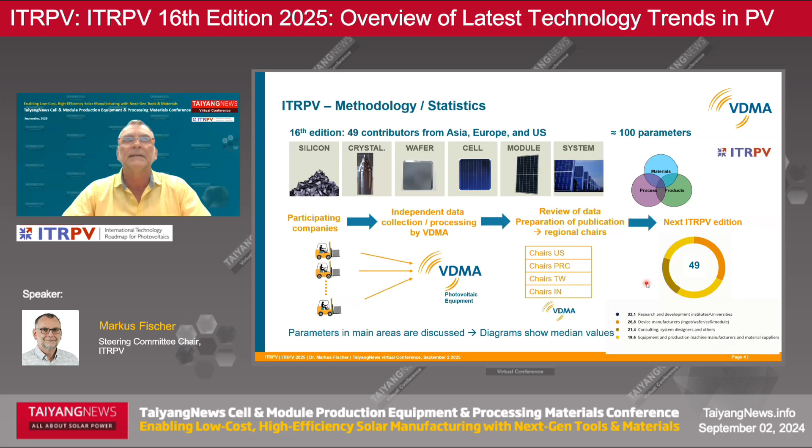So the 16th edition was issued based on the contribution of about 50 contributors from Asia, Europe and the US. So we have this well-known structure here to cover the value chain, and the preparation of the 17th edition just started, and I invite you also to contribute, and this would be highly appreciated.

So now let's start here with the learning curve. So the summary is here, the price learning of the modules that are shipped. And based on the shipments of last year, we calculated about 700 gigawatts of modules shipped at a tremendously low price of $0.08 per watt peak. And the expectation is for this year that these numbers will be even larger from a shipment point of view. So we expect 750 gigawatts, and the price is expected to stabilize.

So installation, in contrast, is a little bit lower. Nevertheless, it is a huge amount of material in the market, and a tremendous price drop. So it was in the past also visible in the learning curve. So we had several phases of price reductions, and afterwards the price recovered a bit. And so we expect this as well.

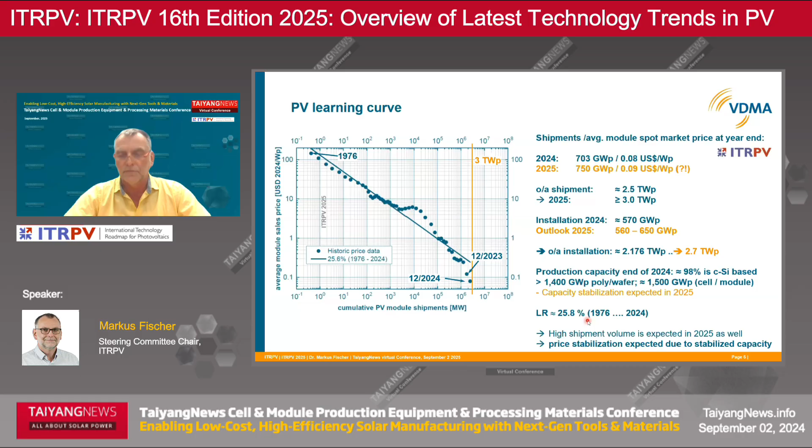But nevertheless, despite the price stabilization and the huge overcapacity, it is a big challenge to continue the development. And so we will see what is the expectation here to maintain this learning rate of about 25% also for the next years. So what was the scheme for calculating the price here?

The shift from the material point of view in crystalline silicon-based PV was from multicrystalline to mono, and now from P-type mono to N-type. N-type is dominating, and we saw at the end of last year no big differences between N-type and P-type prices.

And the very interesting point regarding the volumes shipped is that not everything went into installation of new capacity, but also a significant share of the shipped material went into repowering. And here, beside Thalheim in Sachsen-Anhalt, Germany, we have a power plant, and there we find quite excellently that repowering occurs. So this part of the field was repowered with much less modules than expected. So this does not increase the overall installed capacity.

So this brief introduction leads me now to the trends. As mentioned before, N-type is now the mainstream material. Nevertheless, we still have some P-type material in the market. And a very interesting trend that we found in the past is the trend of the wafer formats. And this is the thing that material suppliers and especially the equipment suppliers have to take care of.

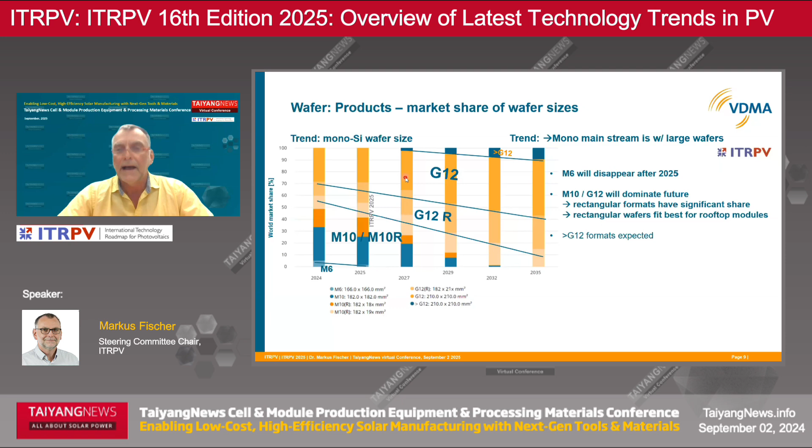So the trend from the smaller formats: M6 is now nearly gone. M10 and M10R are still in the market, but the biggest share is with the large formats, G12R and G12. And these we expect to be dominant in the future.

And here the interesting thing is the thickness of the material. What we see here is that the thickness for PERC, for P-type, is coming to an end. So 130 microns will be the end. But for N-type, we see that the trend is going to 120 microns.

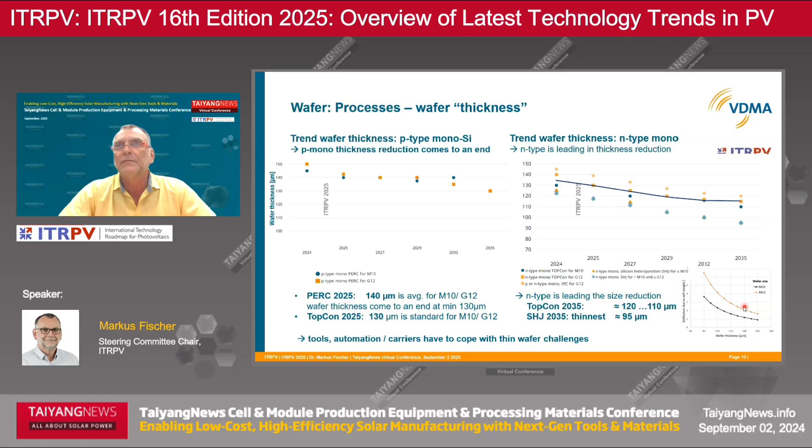So I saw the first G12 also with 110 microns in the market, but this is more or less important for today for the heterojunction. But for TOPCon, the dominating format in the market is 130 micron. And this will contribute to a significant price reduction in the future. Nevertheless, the tool suppliers have to care about the thin wafers and the challenges that come with them.

So now let's have a look at the cell products, and this is the most important trend we see in the market: TOPCon is now the dominating technology in the market. So in 2025, PERC is expected, from the ITRPV point of view, to have less than 20% market share. Maybe the changeover will go faster. And we see other N-type technologies as well. So heterojunction and XBC, the back contact cells, are coming more and more into the market. And all these things are ready for bifacial. So this is very important to know.

And what is important, with this technology changeover, especially since we have this huge overcapacity, new capacity is only possible by replacing existing capacity. And so for these technologies, the tools have to be ready and the tool and material suppliers have to support this transformation. So now to the details in the process that the ITRPV found.

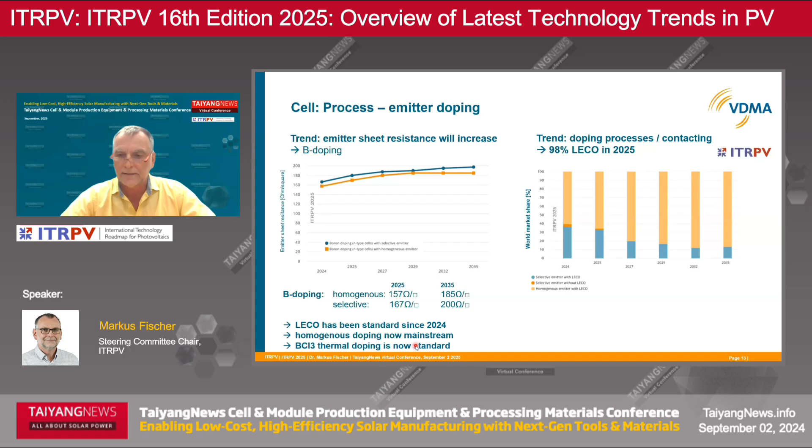So, trends in wet chemistry. We see that especially regarding the edge isolation, we have a changeover from HF/HNO3 to alkaline etching. So the phase-out of HF/HNO3 is continuing. And regarding cleaning processes, we see that ozone-based cleaning is gaining more and more market share. Heterojunction currently also uses RCA cleaning, but ozone-based cleaning has a big market share also for heterojunction.

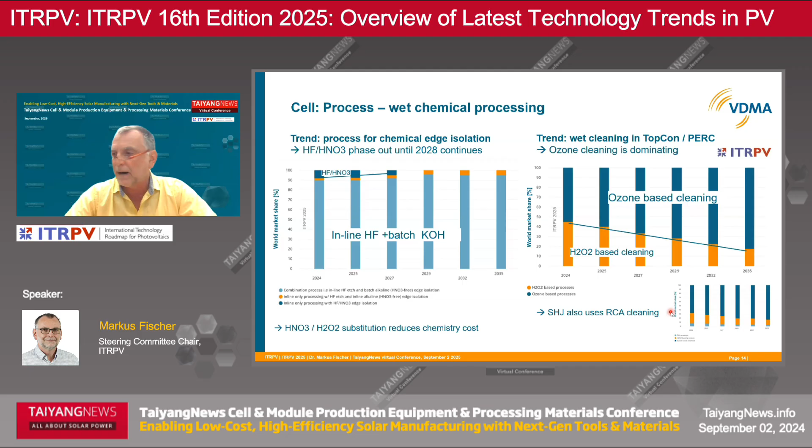So then we will also see in the conference trends and tools for ALD for aluminum oxide passivation, which is used for PERC and TOPCon. And we will see, especially for the TOPCon technology, how the amorphous silicon is formed. And ITRPV sees that there is a 50-50 share so far, also for the future. But it will be interesting to see what will be the tool concept of the future. And there we will see some interesting presentations, I expect.

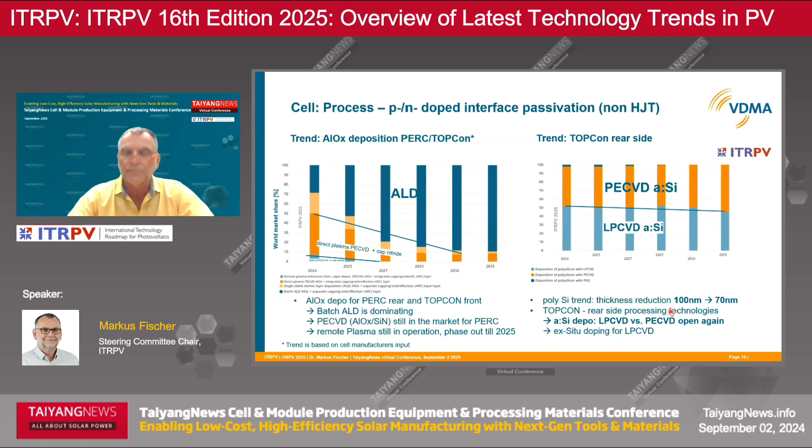So coming to the tools, this is also a parameter that is reported in the ITRPV: the tool throughputs. Regarding throughput, the wet bench tools are really leading the crowd, but nevertheless ALD in the future is expected to increase the throughput up to 18,000 wafers per hour. So this is a tremendous increase, and let's see how this will be realized, but this is required to also lower the production costs. And boron diffusion is currently at the lower end of the throughput, but is also expected to be improved.

So a very important and the most costly material besides silicon on the cells and on the modules is the silver. And there we see the trend that silver consumption is reduced. We have defined in the ITRPV a kind of minimum requirement for the silver consumption per watt, and we have the differences for the different technologies. So PERC is currently consuming the least amount of silver. But what we see is that the minimum requirements of ITRPV are now even beaten by the current tier 1 suppliers. And the World Silver Survey found that the overall silver consumption last year was about 6,000 tons.

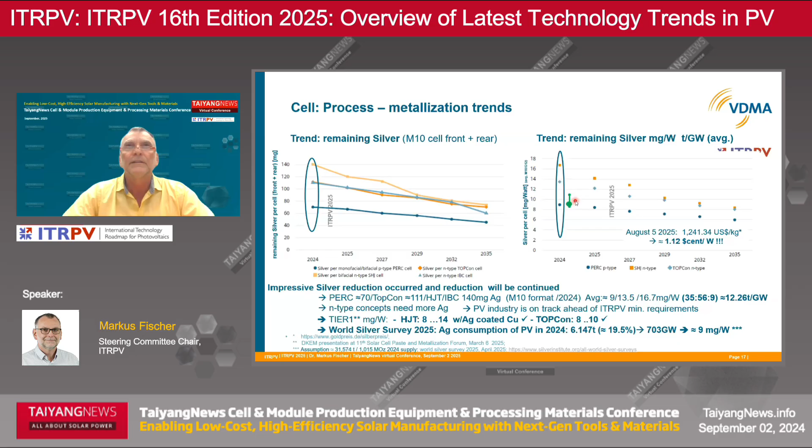And this corresponds at the 703 gigawatt chip to about 9 milligrams per watt. And this is well below the minimum requirements and well on target. So that will ensure that we have for silver no shortage in the future. This is a very important message, and we have had this discussion for some years. So will we run out of silver?

So based on the technology development, and I expect here also from DKEM some interesting news about the silver consumption, we are on a good way. And reducing the silver consumption is also supported by the new technologies, heterojunction and the new coming tandem technology. So we will more and more use also copper with silver coating and maybe also pure copper. So this is expected for the future.

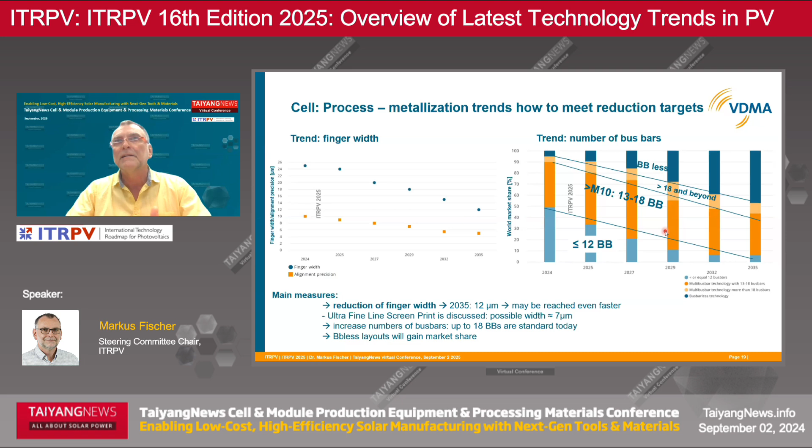So how to realize the silver consumption reduction? This is mainly done by reducing the finger widths. There are really impressive new technologies for printing, and ultra fine line screen printing is also possible with down to 7 microns. So this will also be in line with roadmap requirements, and this finger reduction goes in parallel with increasing the number of bus bars, and the trend to more than 18 bus bars and the trend to bus bar less is going on.

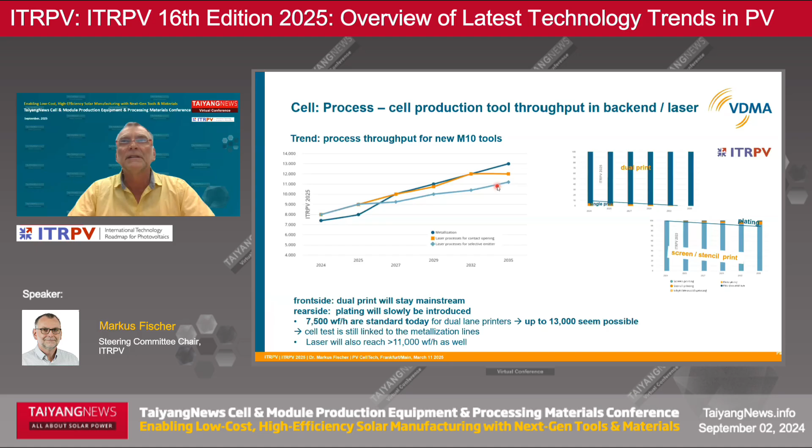And regarding metallization and test, we see here also the throughput outlook, and the 7,500 wafers per hour are standard today, and the expectation is that this will increase up to 13,000 wafers. So let's see how this will be realized.

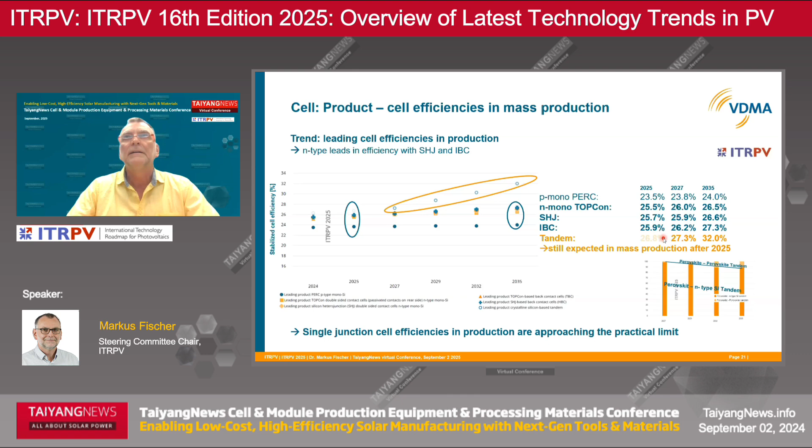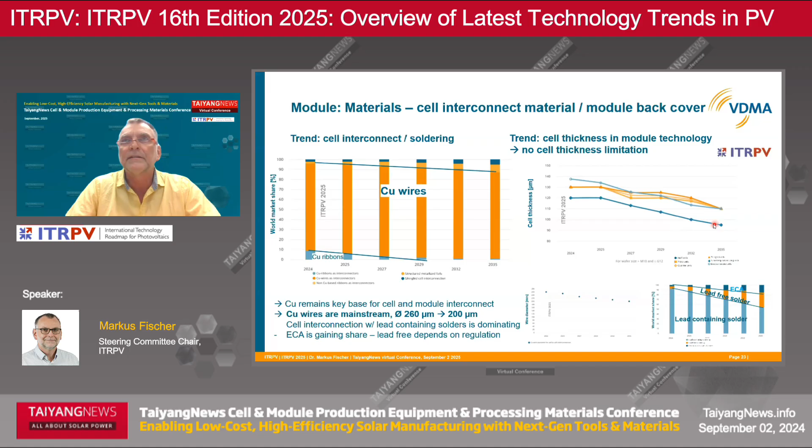So now some highlights on module. Copper wires will stay here the main interconnect material. And what is important here, the module technology can handle also the thin wafer, so this will be no problem at all for module technology.

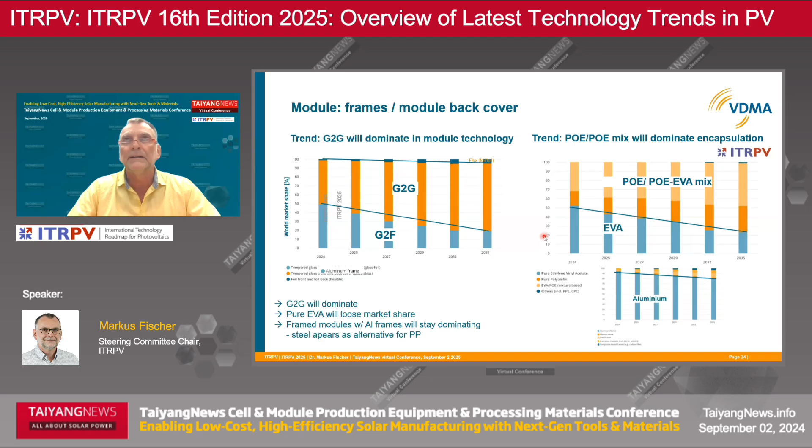So module trends. Shravan mentioned that there is big progress and a lot of products in the market. Glass to glass is gaining more and more, especially also with TOPCon technology. Nevertheless, there are here with the materials also challenges for the encapsulation. And here I expect also in this conference some news about encapsulation materials and backsheet materials for the glass to foil.

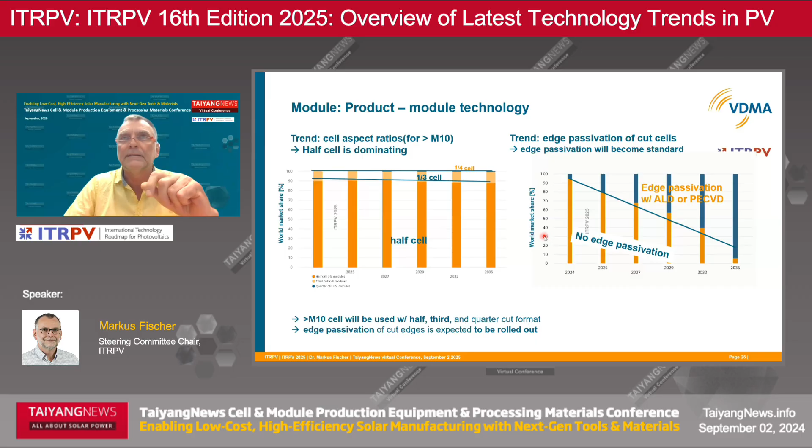So here half cell is standard. And interesting is also, to even increase the efficiencies, that we will see edge passivation in the market for these cut cells. And module efficiencies are expected to go in parallel with the increase of efficiency on the cells, to above 26% with tandem, but on a level of about 24% with mature single junction technologies.

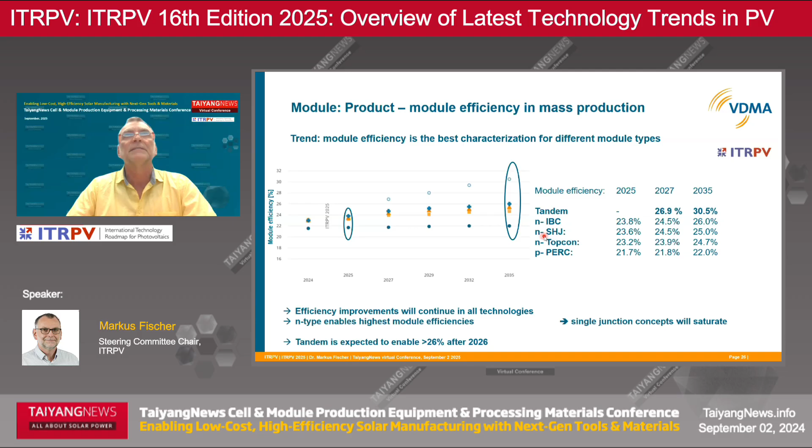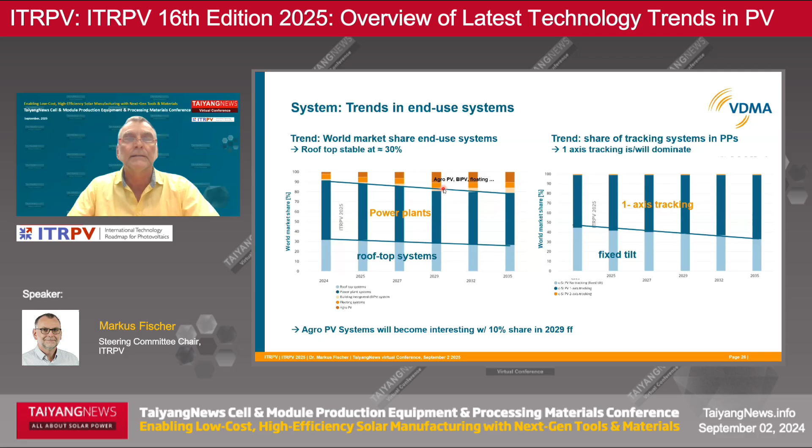So now a brief summary on the system trends. First of all there are the mainstream applications, rooftop systems and power plants. The share of rooftop systems is expected to stay constant over the next years. But here we see new applications coming up, especially agro PV, BIPV, and floating.

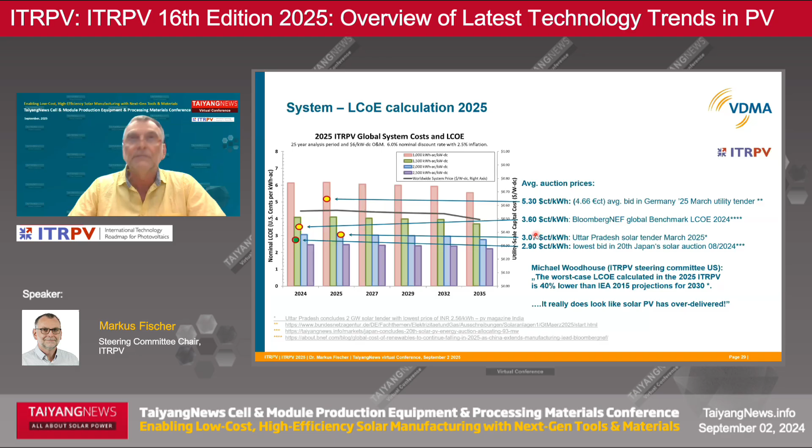So LCOE. PV is really progressing quite fast, and we are really ahead of the former expectations of IEA. Even in regions with not so much insolation, we can reach below 5 cents per kilowatt hour LCOE. And this is really impressive, and the PV industry and the tool suppliers are part of this success.

So now I come to the outlook. We saw in the learning from the years 2006 to 2024 an accelerated learning, up to 40%. We will see if this can be continued, but what is for sure is that the efficiency learning and the per piece learning will continue, and that we can really continue this learning also in the future.

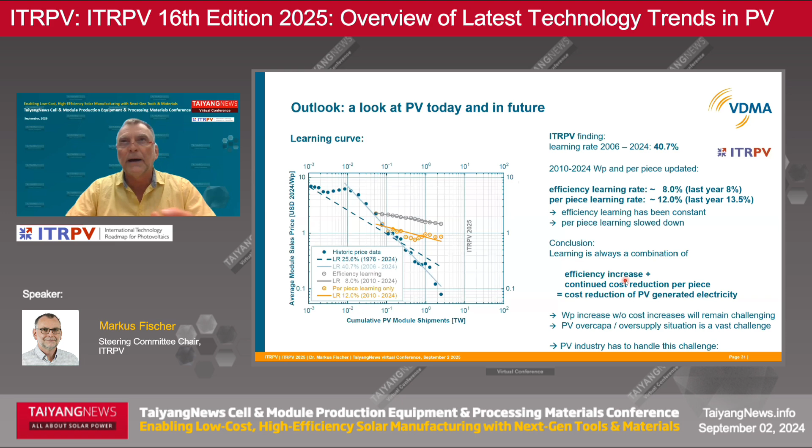And so despite the overcapacity, the PV industry and the PV suppliers and the tool suppliers have to handle this challenge. So the outlook for 2050, so this is the future where we look in the ITRPV since some years, is that in 2050 we will have 63 terawatt peak installed, and the roadmap to this is fulfilled so far. So we are well within the expected market size with the ship volume of last year,

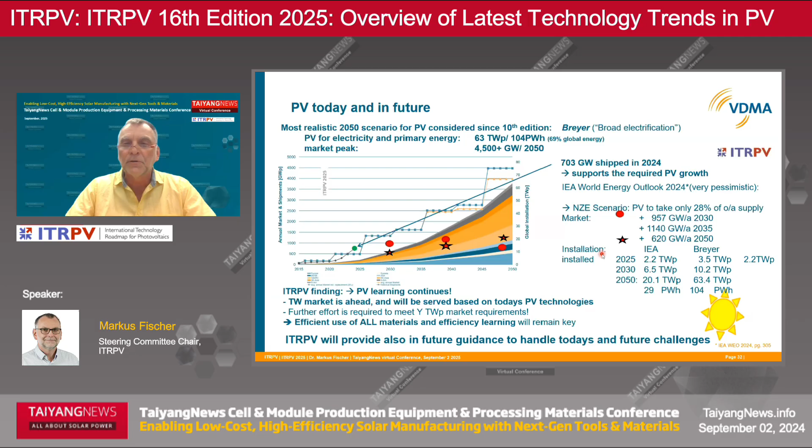and the expectation is that we will be, with the PV installations, ahead of the IEA predictions, and so we are sure that the PV industry can handle the current challenges, and ITRPV will contribute also in the future. And so I invite everybody to contribute to next year's edition.